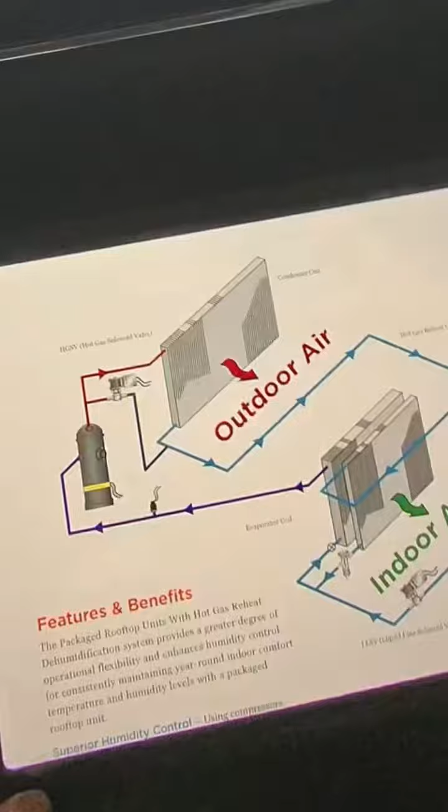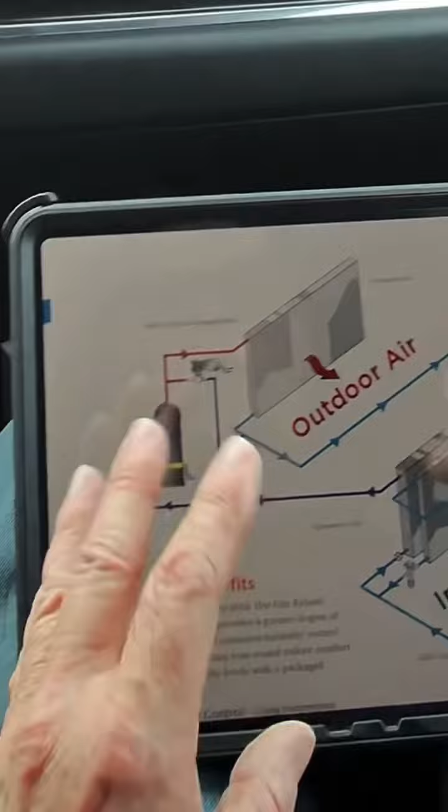Here's a little lesson on how hot gas systems work, and how some hot gas systems don't work very good for grow rooms. Over the last couple of years, we've been working on this hot gas stuff, and we have a couple of jobs.

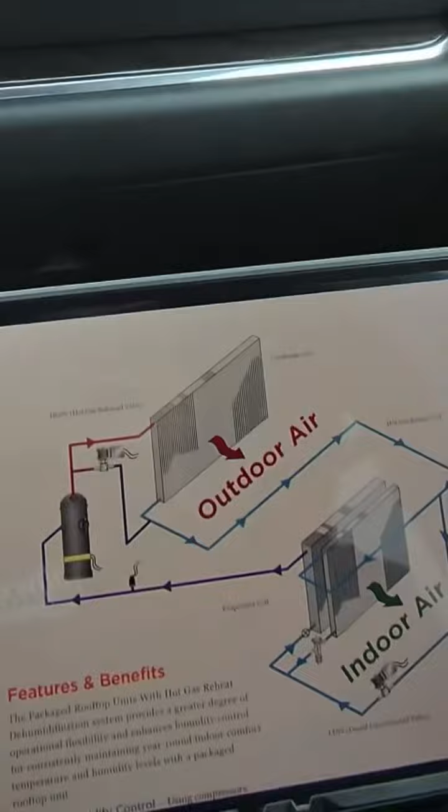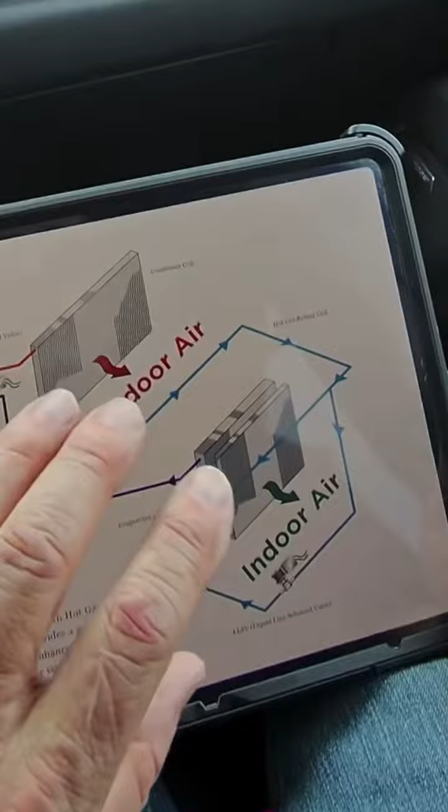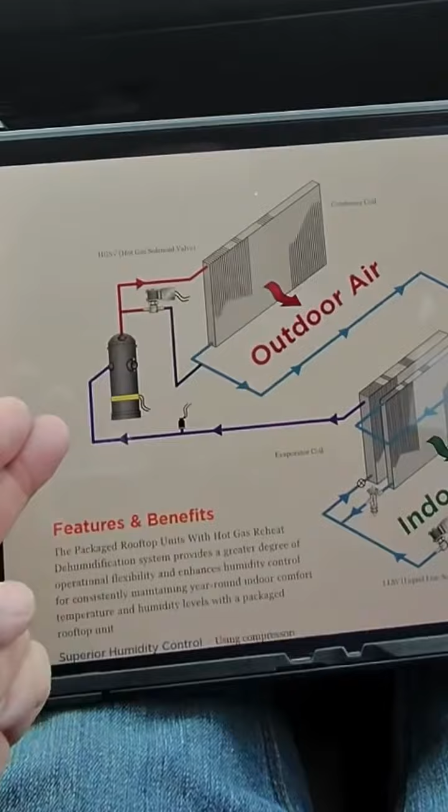There's a Warren, Michigan job that has a bunch of these Carrier rooftop units specifically. Lennox does the same methodology. Not all package units do it this way, but what I'm explaining to you is the reason factories choose this methodology: they make the assumption that their unit is going to be in a mall or a school classroom setting, for example offices, any type of commercial space where when there's people in the building, the people are adding humidity to the building, and that humidity needs to be removed.

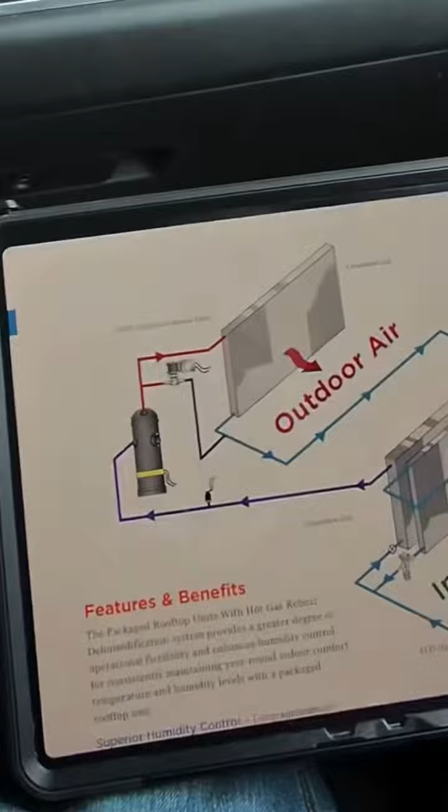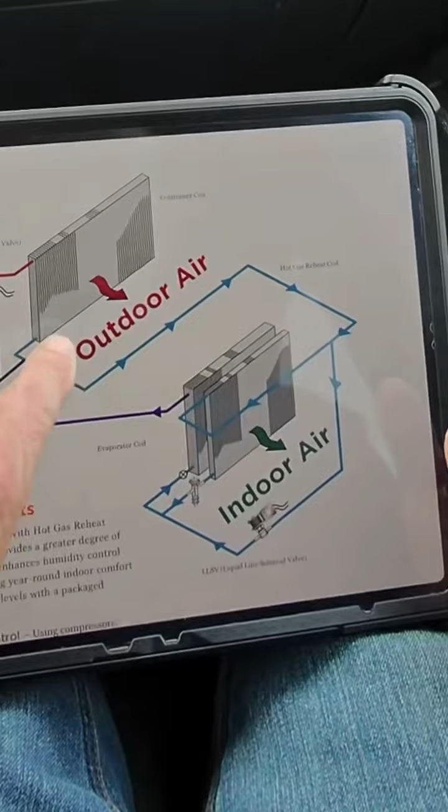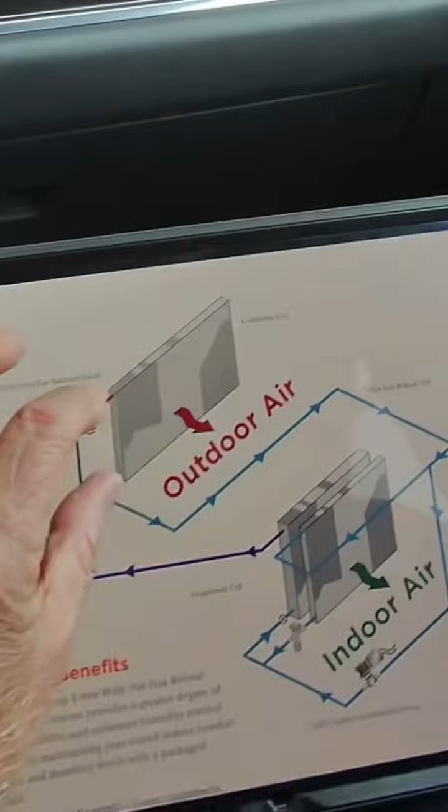So they don't build these machines for indoor grow rooms. What happens is when we use this system on an indoor grow room, when the lights are off, this system— notice how this is the hot discharge line. So when they want to do reheat, they open up this solenoid valve, but notice they don't close this coil off. This coil can still flow, and as a result some of the flow still goes through that coil, and some of the heat from the room is lost if the lights are turned off inside the room. When the lights are on, it's no big deal.

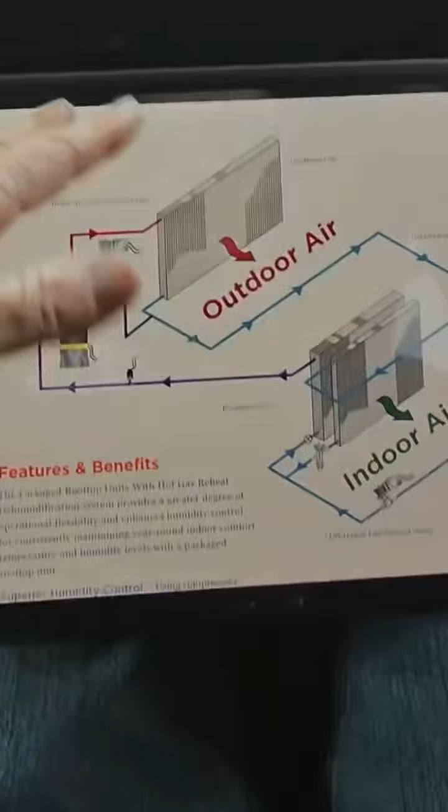The lights are creating sensible heat, and so we need to get rid of some extra heat during that time, and that's why they do this—to get rid of heat that we don't need to do reheat.

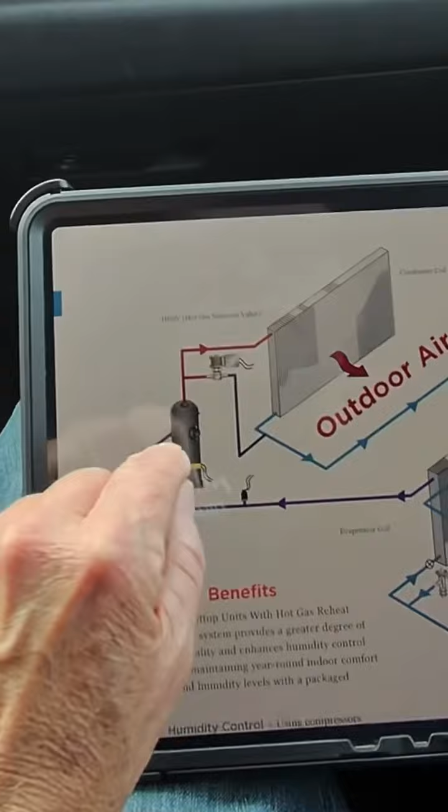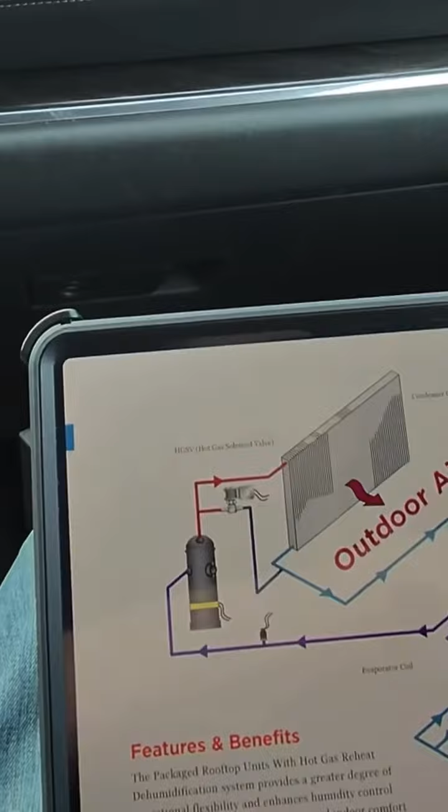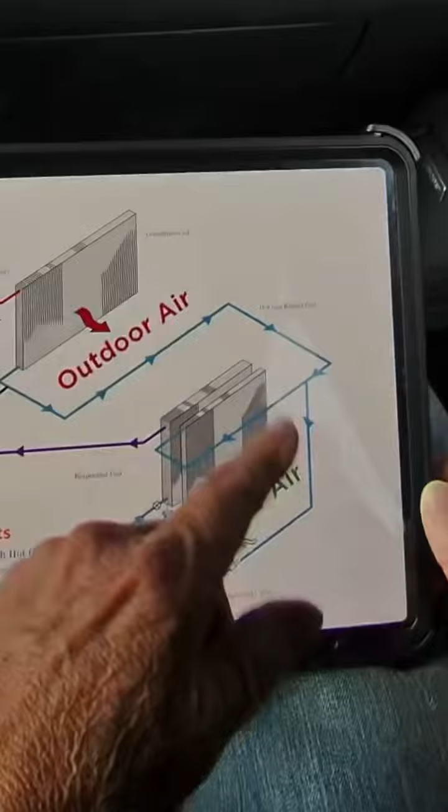Because you see, this compressor puts out more than 100% of the heat that it removes. Right here, the compressor is removing heat, but because of the electrical motor and the heat of compression, this compressor adds about 15 to 25 additional percent of BTUs. So if it's moving 100,000 BTUs here, it's pumping out 125,000 BTUs here. And if all of that heat was to come back in, we would no longer be reheating, we would be heating, because we would be adding heat to the air, not bringing the temperature of the air back up to a natural or neutral point.

So, normal operation—I'm going to talk about that in the next video, because I know this one's running long.